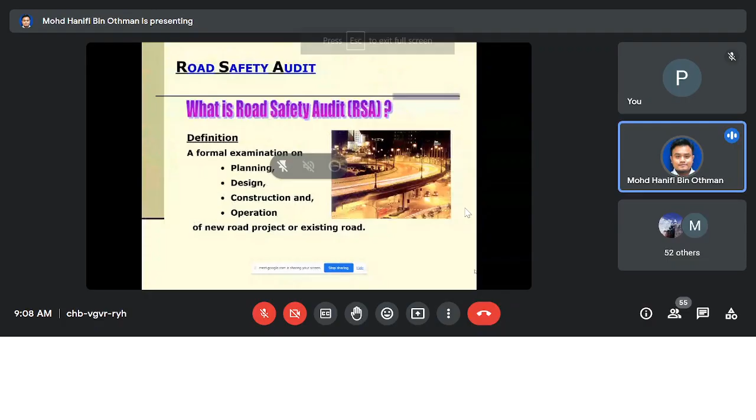Okay class, this is the topic for today: road safety audit. So we go to the definition. Road safety audit is the formal examination on these stages, starting from planning, design, construction, and during operation of the road.

It involves new road project or existing project. Nowadays they make it regulation to have independent party that will audit or examine the road from the safety perspective, not only during construction, but even after construction is finished. That means during operation of the road, they can also assign this independent party, someone not tied to the consultant or client, who will audit the road.

Can you hear my voice, class? Yes doctor, we can hear you. Okay, good.

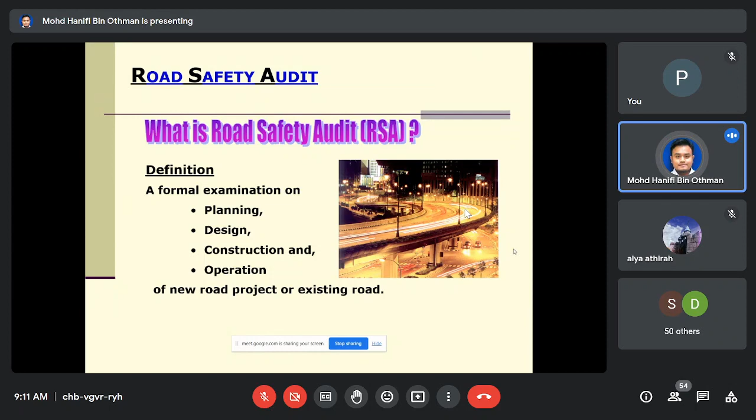If you have schools, they have school standards for dropping off and also picking up school children. They also have standards special for that. So many standards - this is one of the goals of RSA, to achieve or meet all these practical standards.

By how? By identifying the potential safety hazard on new projects, on existing roads, and then providing the mitigation measures - the control steps to reduce the hazard.

By this way, they reduce the life cost to community. The accident cost is too high, then community needs to bear that. But nothing can match the loss of life, including the loved ones - nothing can pay for that. So it's important, everyone will be using roads, so we want the roads as safe as possible.

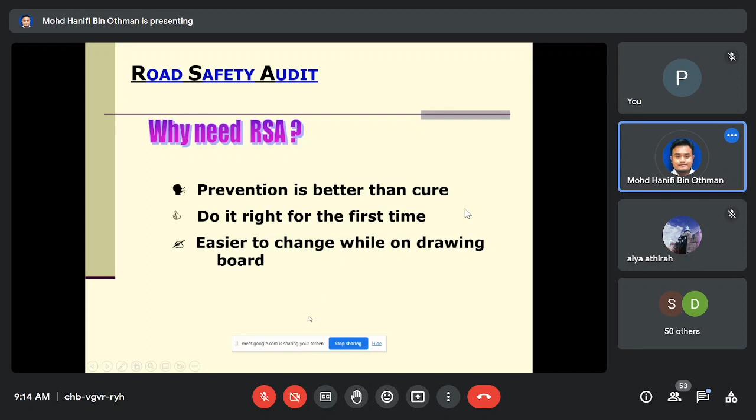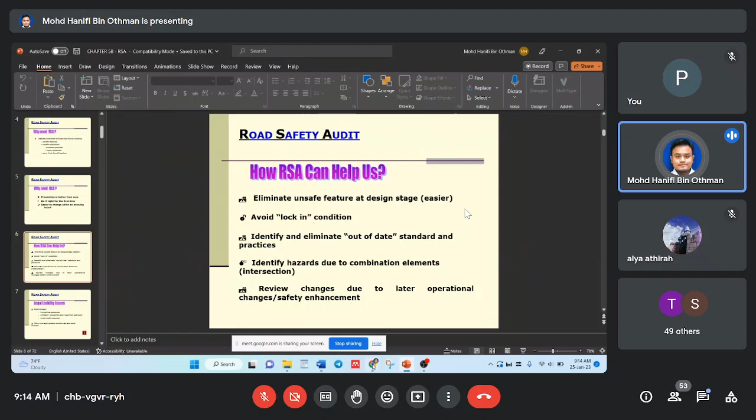Doctor, sorry for the disturbance, someone wants to join but I didn't hear the signal to join. Okay, welcome to both of you.

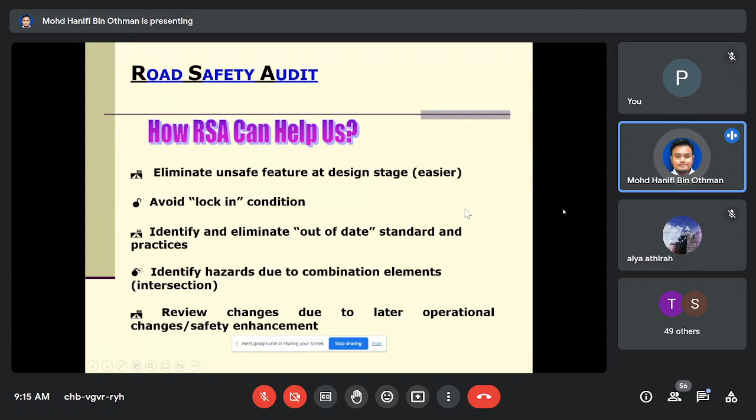So we already are on slide 6. This one you can read by yourself: avoid outdated standard and identify hazards. The concept is a proactive accident prevention and reduction approach.

Avoid costly payouts - insurance or other payouts to the victims of road accidents if that happens. And if the accident happened because of poor design of layout, maybe the authorities need to pay compensation to the road victims.

Thus, the legal system should embrace such concept. They must involve independent examiners, and also must be qualified.

Qualified examiners where the person has professional engineer status. Any drawing or any report must be certified by this person. They have IR - in Malaysia we call it IR, professional engineer.

And for this time, they call it professional engineer with competence certificate, PEPC - professional engineer with practicing certificate.

And experience in analysis and diagnosis of accidents, and have design experience before they can be appointed as RSA. They must have design experience and also related experience in analysis and diagnosis of accidents.

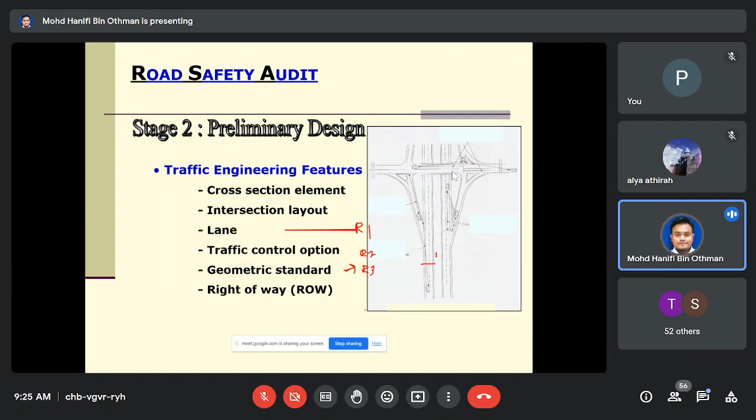So they decide this road is near a factory area with many heavy vehicles passing through, so maybe they need a better road design standard. If you remember in highway engineering, they have R1, R2, R3 up to R6 for rural area road design, and U1 until U6 for urban roads. So they choose which standard will be used for this road.

And the last one is the right of way (ROW) of the road - how much land they want to acquire for this road, the amount of road reserve required for this road.

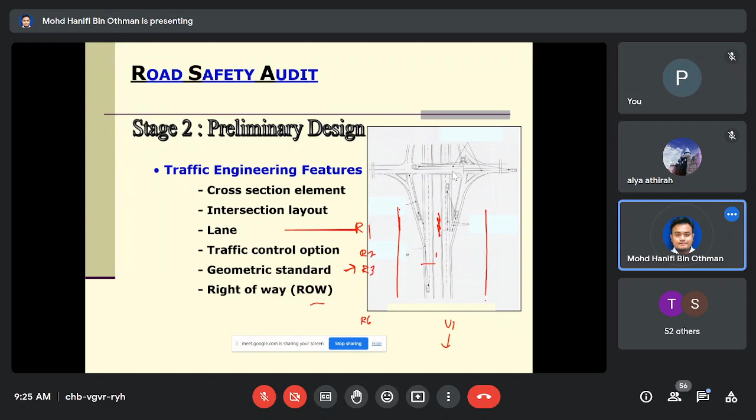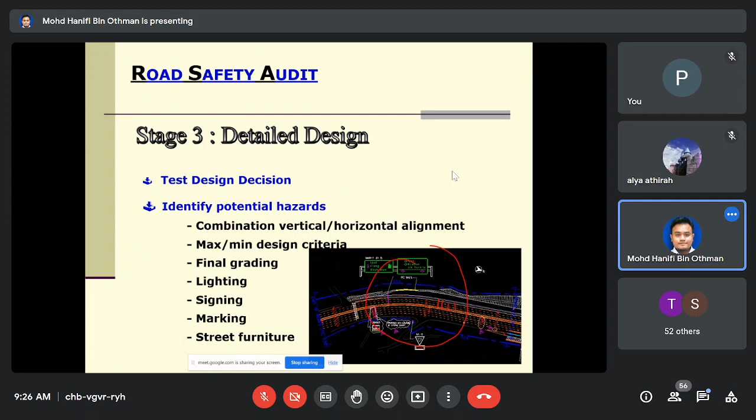Okay, before the opening of the road, finish construction, so need to do the site inspection physically on road during the day and operation of the road. You identify the safety problems that happen during the operation of the road.

Okay, for the existing road, you need to have the accident data, which you can get from the nearby police station.

This is different from black spot study. Black spot is a location where accidents always happen, that's why they call it black spot. If I'm not mistaken, at least 3 times per year fatal accidents. When they have 3 times fatal accidents at that particular location, they call it a black spot for that road.

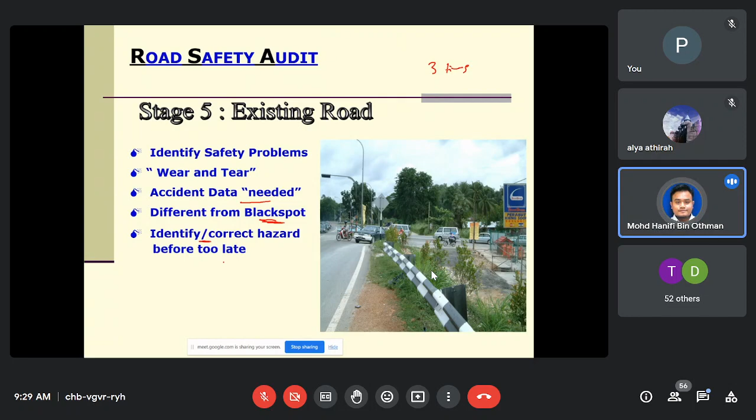Okay, but for road safety audit, it's not about black spots. It's not necessary that an accident happens before you conduct it. You even conduct it before a black spot happens, before an accident happens. So it's proactive, so you can identify and correct the hazard before it becomes an accident, before it becomes too late.

So the steps for RSA.

This is a simple quiz. You can check your understanding by trying to answer this later on.

Okay, this is an important one. Stage 5, audit of existing road. What to audit during the existing road? After completing all the design process, the road is already under operation. What do you need to audit? These elements: vertical and horizontal alignments, cross section, intersection, interchange and expressway, traffic signal installation, street

lighting, traffic signing, and all of this, roadside safety, general traffic management items.

Okay, the first element is vertical and horizontal alignment. You need to check whether the alignment meets the standard. For horizontal alignment, it depends on the speed, the design speed. They have the radius. I don't know what happened,

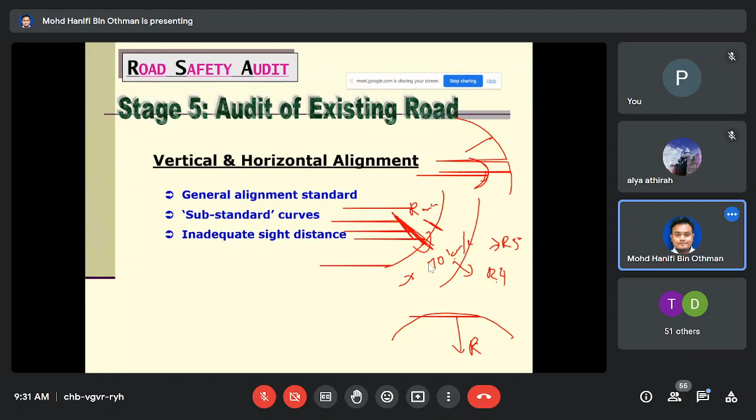Okay, the second element is cross section checking. It must be a consistent cross section. You cannot have one section small and suddenly at a different location it becomes big, then small again. It must be consistent, need to check for that.

And correct type of curb, provision of footpath, paved shoulder. Okay, and check also for the access control.

Okay, this example cross section here is good. The problem with this location is the absence of footpath. Maybe the ideal road must have a footpath, because this is maybe a pedestrian area, many people will walk on this road. So ideally you provide a footpath for the people, so they will not be walking on the pavement.

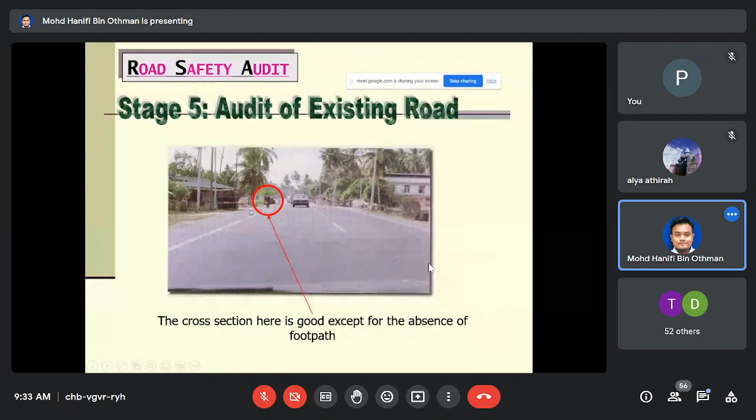Okay, like this one, the intersection audit. Intersection layout which may look okay in plan view, but can be confusing when viewed from the driver's eye height. When the driver's eyesight view is quite confusing, you need to rectify this so it becomes less confusing. Road signages must be clear, must be able to guide the driver, so it's not confusing.

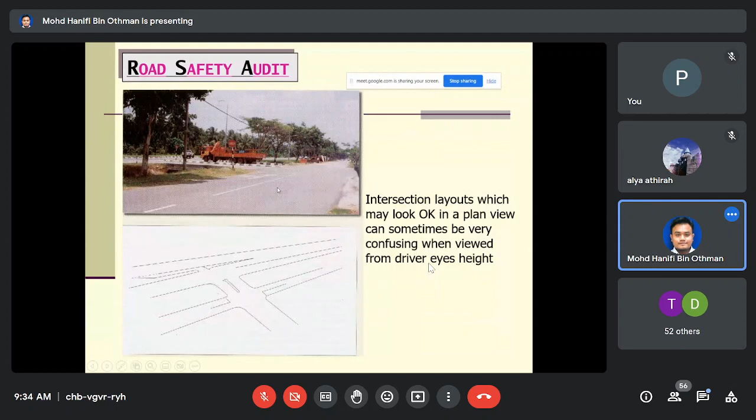Intersection, need to check the sight distance of the intersections, and then the layout of the intersection. Many problems, many criteria need to be checked for intersections. Cater safely for all road users, not only for cars. Intersections must be safe also for motorcyclists, maybe cyclists or pedestrians, and also heavy goods vehicles.

Heavy vehicles must also cross the intersections safely. And check for the auxiliary lane, whether they provide it. The ideal intersection has an auxiliary lane, a lane for you to slow down and a lane for you to speed up, auxiliary lane. In the industry they call it

ACDC lane, acceleration lane or deceleration lane. Any discontinuity of through lane, a lane that closes, check if there's discontinuity of through lane. And occurrence of trap lane. Okay, trap lane, sometimes this is a two-lane road. Okay, some road designers suddenly

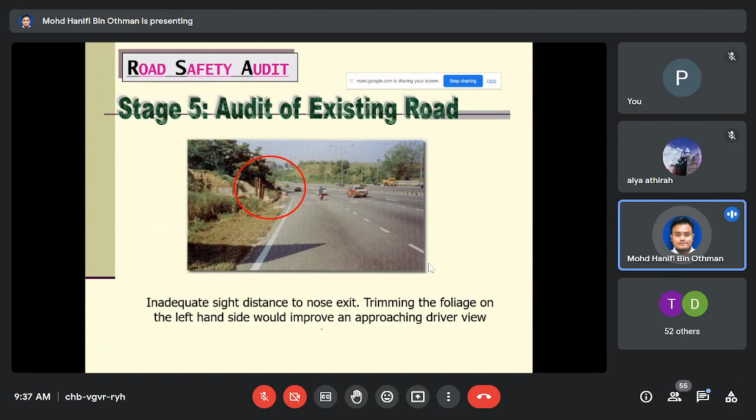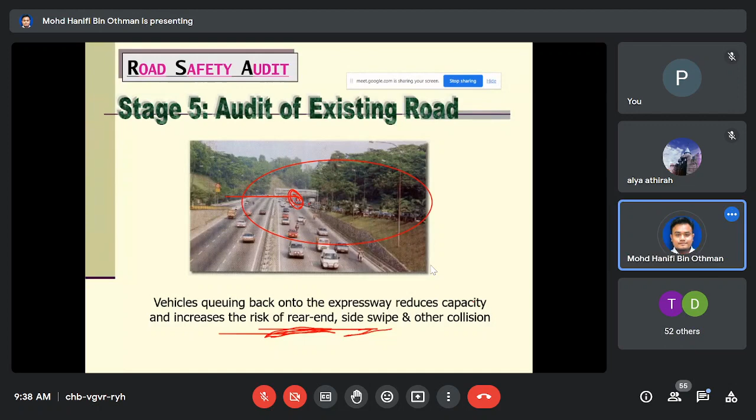Okay, this is regarding expressways and interchanges. They must be appropriately located, and the spacing between interchanges must be suitable. Problems associated with incompatibility must be separated at grade. That's the best, and we need to check whether the interchange meets this.

Usually for expressways, they already provide separation at grade, meaning a flyover for the exit. And the ramp is appropriate and follows the standard.

And the auxiliary lanes have the taper, because usually for high speed there must be a taper to smooth it. If you just put it like this, it doesn't have a taper.

Traffic signal installation must follow the warrant, like we discussed before in previous classes. They have the warrant for the traffic signal, and the location, provision, and spacing between two traffic signals must also be suitable, and operating effectively and efficiently, with adequate signal hardware.

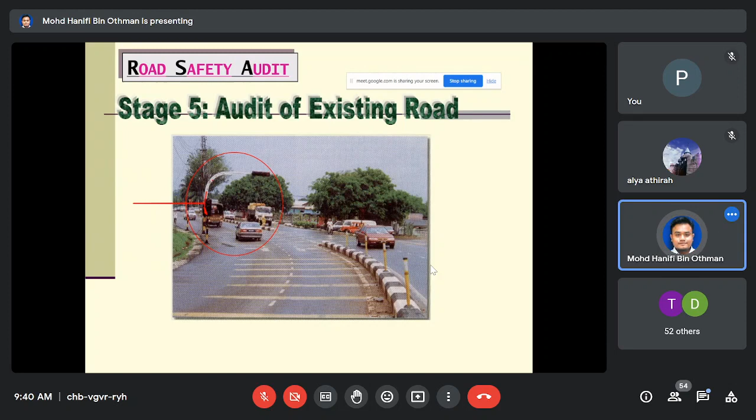The traffic signal here lacks visibility. Okay, like this one, it's hard to see the traffic signal. And some of them are hidden by traffic signs. We must be careful that traffic signs are not hiding the traffic signal.

And some of them are very near to the curb, which becomes dangerous to motorcyclists. Motorcyclists sometimes park here, and it gets caught there.

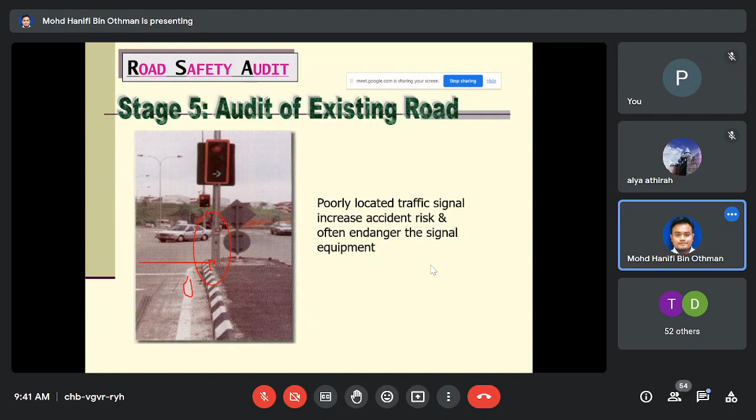And street lighting, you can see the street lighting must be checked also. This is the criteria for the street lighting.

And traffic signing, traffic signs must be checked, suitable traffic signs for the road. The location and spacing need to be checked. You cannot just simply put any traffic signal for that particular location, and there also cannot be too many.

It will be confusing to the road users. And it must be clearly visible, and the information must be legible and cannot contain too much information.

And the type of signpost must follow the standards. They also have a standard for the material of the signpost, and also the plate of the traffic sign, and the clearance of the traffic sign, the height must follow the standard.

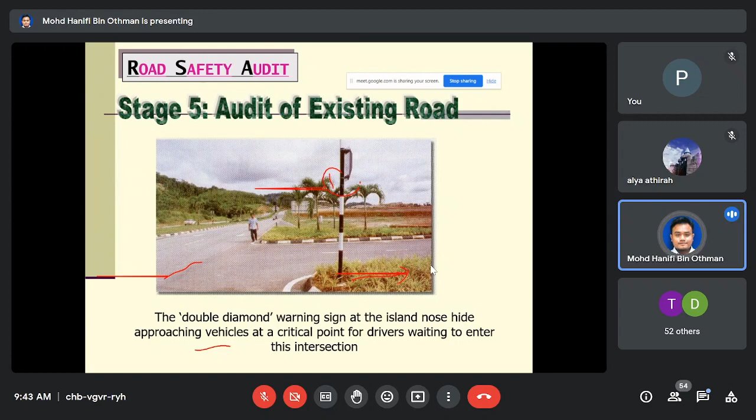And this is the problem regarding the double diamond warning sign at the island nose. It can hide approaching vehicles, blocking the view at a critical point for drivers waiting to enter the intersection. So maybe it needs to be shifted a little bit inward.

This is pavement marking, the marking on the road surface. The positioning of the stop line, the yellow bar, justification, and effectiveness of road marking during night and wet conditions also need to be checked. So nowadays road marking also uses reflective material that can reflect light during night time.

You need to check the road layout. You need to plan and maybe put enough warning signs that there will be a sharp curve in front of you.

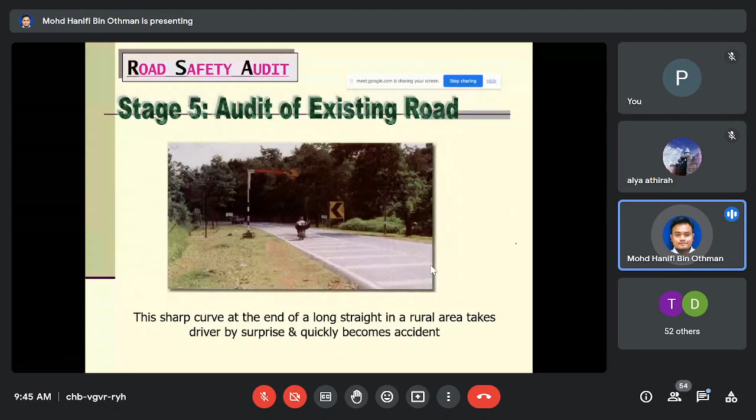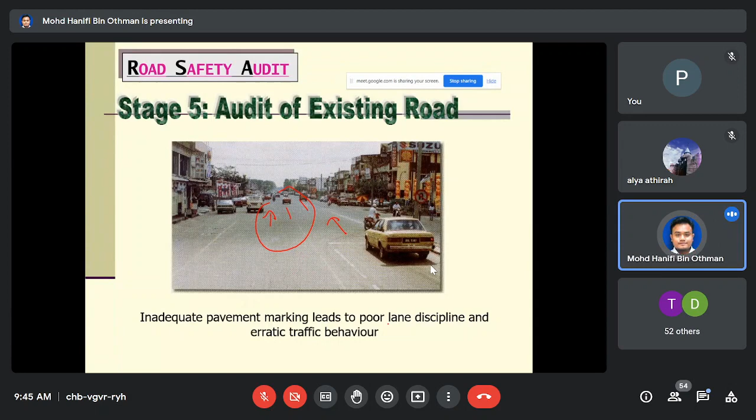This is the problem with inadequate pavement marking, which leads to poor lane discipline. People just drive however they like by themselves, because there is less visible pavement marking, resulting in poor lane discipline and erratic traffic behavior.

And road marking must be logical and suitable, appropriate for the particular road. If it's not suitable, motorists will lose trust, the pavement marking will lose its credibility, and motorists will ignore it, increasing accident risk.

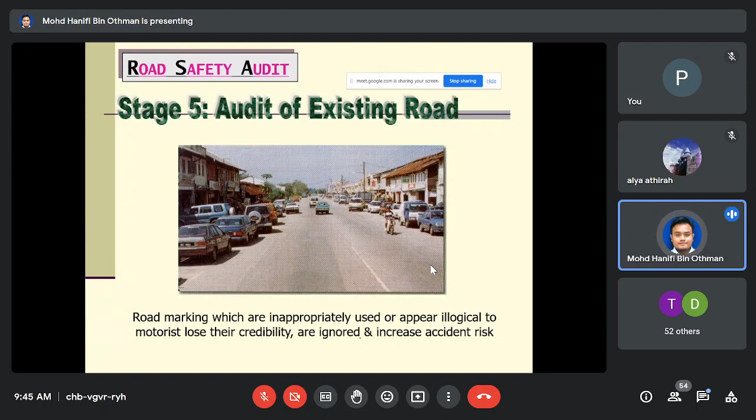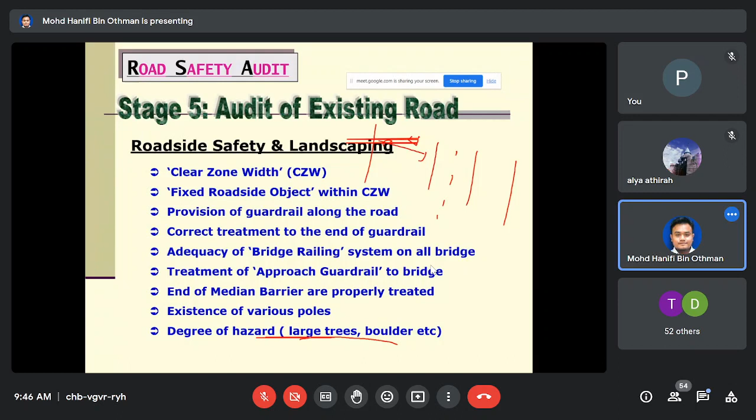So this is an example of the clear zone width, CZW. You can put your signages along the clear zone width, and never allow any construction nearby on this clear zone.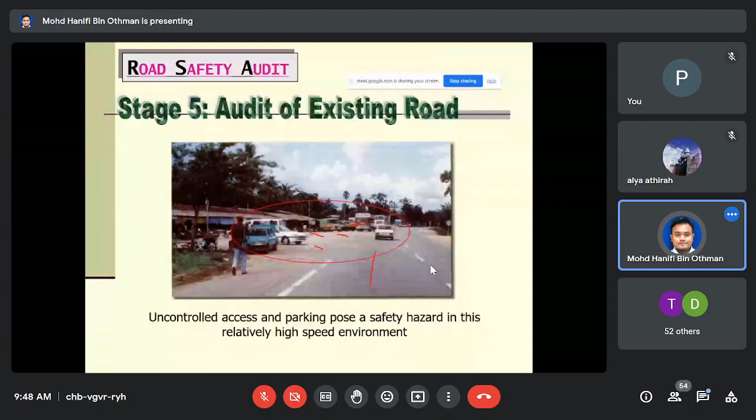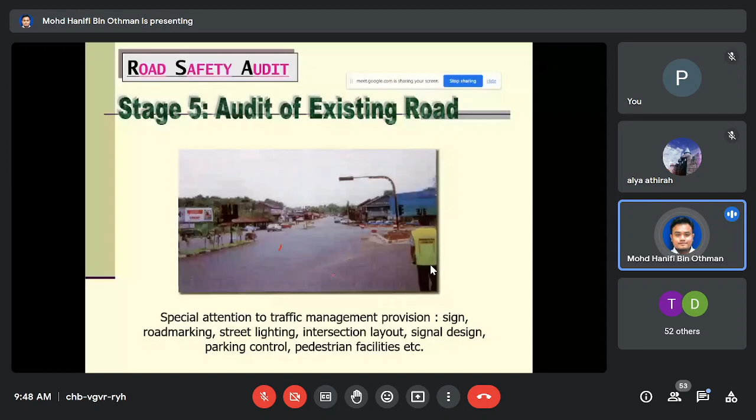This is how they comment it. Street lights and traffic sign posts all mounted very close to the road edge, like this one. Terlalu rapat dengan road edge, very dangerous for motorcyclists. And street light condition also too close to the road edge.

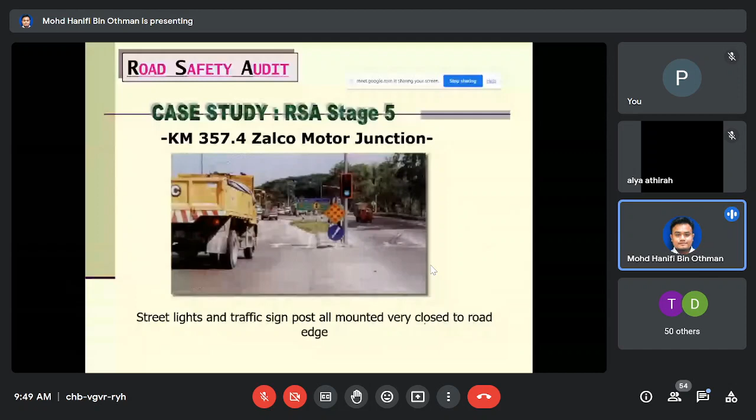And the seagull type treatment involves trap lanes for right turners. Like this one, this is jalan dua lane, and then lane kanan tu suddenly becomes the deceleration lane, ataupun waiting lane for the right turn. So lane kanan jadi trap lane. So people from high speed need to stop and then need to change the lane if they want to pass through this intersection. So dangerous.

Complex traffic movement. Apa tu? To the old highway carriageway on the northeast side of the junction. Ini gambar lama. It happens sometimes like this one. So people will get confused. No lane, people maybe termasuk kat sini pula.

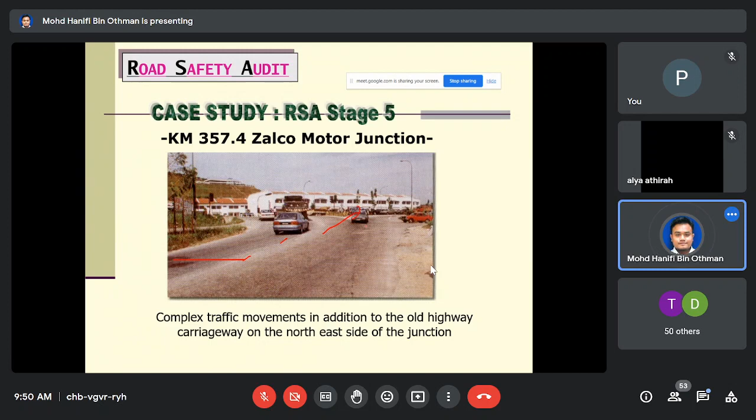Lack of channelization on the side road and visibility of the highway. You can see that line marking pun tak ada. So people will be taken by surprise - apa yang ada kat belakang?

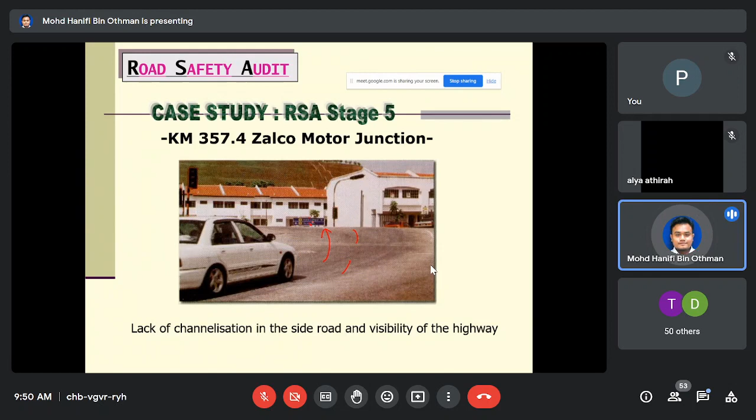Signal post located too close to median. The signal post at the narrow median have been knocked down. Telah dilanggar. Dia terlalu dekat and telah dilanggar, have been knocked down. Large concrete buttress. Ada tiba-tiba large concrete buttress in the median.

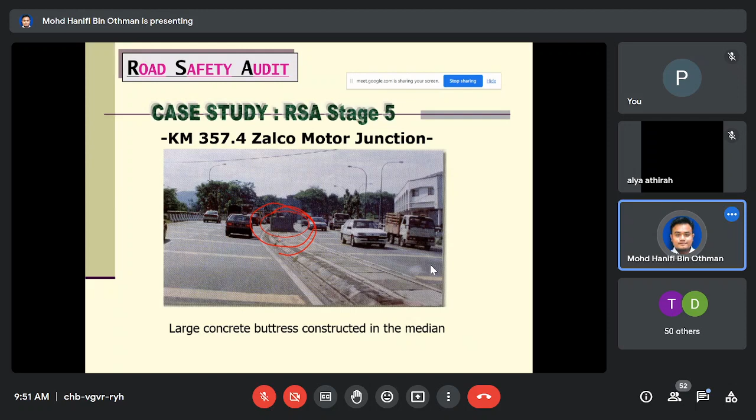Traffic sign pole in bad condition. People cannot see what information is on the traffic sign poles.

This is the second location, high school entrance junction, same Federal Road 1, but this one at kilometer 357.9. Trap lane again. Dia double lane, then suddenly have to stop here pada kereta yang nak masuk kanan. So kereta yang belakang paksa ubah lane. So this trap lane. Kalau kereta banyak sini, so lama you kena tunggu nak masuk kanan.

Two petrol stations, Shell and Petronas, located on short service road just south and opposite of the high school. Located on short service road. They are the service road.